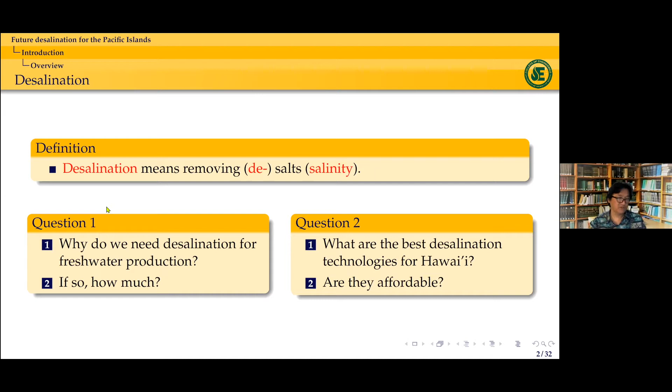Let me start big and then get into the small steps. We are now living in the 21st century, located in the state of Hawaii, in the middle of the Pacific Ocean. If you zoom in on the Hawaii map, there's no land outside of these Hawaii islands. Even so, we have a kind of confined life geographically. We need to know how the world is moving, what the current status of the world is, and how we're going to prepare our lives better starting right now.

There are a couple of terms that define the 21st century: the century of climate change, century of sea level rise, century of population explosion, pandemic disaster - which is new that I just added - and new global governance, meaning that the US was leading the world, but right now this paradigm is changing depending on which country makes more money and the pros and cons of each country. So rather than governing, it's more of a sharing paradigm for the future, both in politics and economy. The 21st century is often defined as a sharing economy. For example, if you have one ocean between two nations, and one nation catches all the fish including small ones, the next year there are no fish. So there should be a certain sharing paradigm between them to optimize performance and minimize any disadvantages.

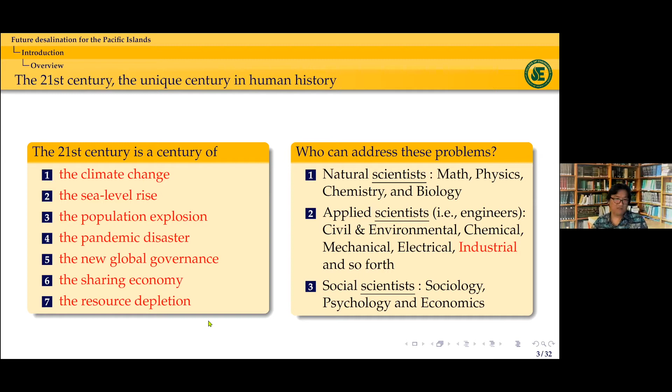So what is the definition of science? There are a bunch of definitions, but most likely science implies observation, experimentation, and making a rule - sometimes called lemmas, and sometimes it becomes principles, laws, and theories. Every single science is based on observation, and we could just observe in a passive way, or we could do better observation based on what we know and what is set up.

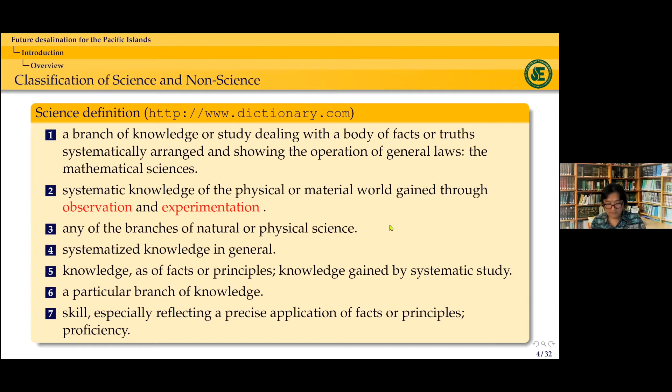So the scientific method is: number one, we observe, just looking at a certain phenomena, make a question and make a hypothesis, then experimentation, analysis, and conclusion. And if these don't match each other, you have to do it again and again until you get self-consistent logic.

One thing we don't always emphasize or remember is that the science we're talking about is fully based on reproducibility or repeatability. So if you do a certain experiment and write a paper to Nature, but the next day you don't get it by changing something a little bit - if you can't reproduce it, or if industry can't reproduce something to make products in a stable manner - reproducibility is the minimum requirement for any science.

However, what we are having in the next decades is not reproducible. Climate change - can you set up any experiment to study climate change? Well, you just cannot. Sea level rise is a phenomenon that will occur, but we don't have any control. We just observe it and try to minimize its impact on human life. Population explosion - no way. Pandemic disaster - you see what all the world nations are doing right now, and we just don't have anything that could control a pandemic disaster. New global governance is all about politics, and shared economy is sharing out of our territorial concept. But the common factor you have to know from item 1 to 6 is it is not reproducible and no one can set anything up. It is a single unique event along the timeline of human history.

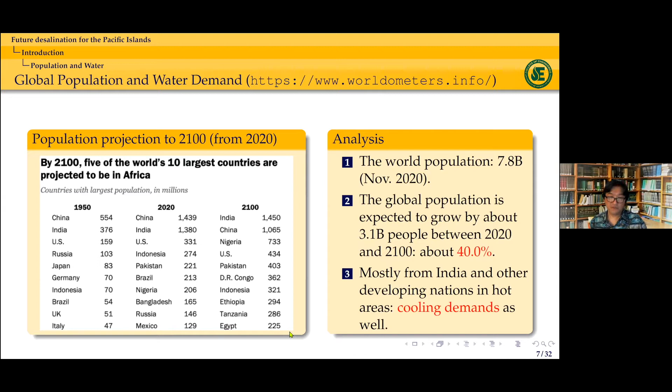You may know that these countries, none of them are in the cold region. They are all in the hot region. Therefore, the cooling energy is also an important factor.

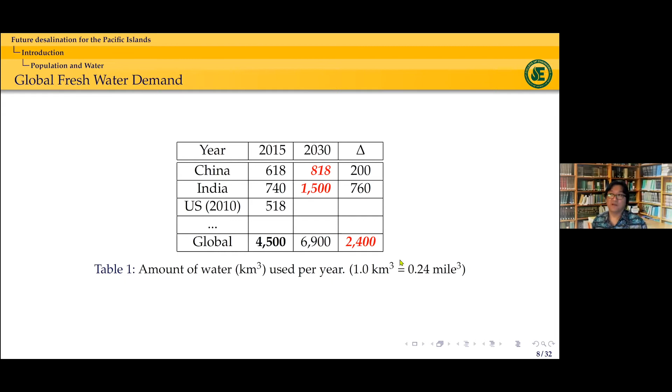Global freshwater demand from China, India, and US - India's demand actually doubles from 2015 to 2030. What we need by 2030 is double what China and India are using right now. So the total amount of water demand that China and India need is what we have to prepare on top of the water resources available at the current moment.

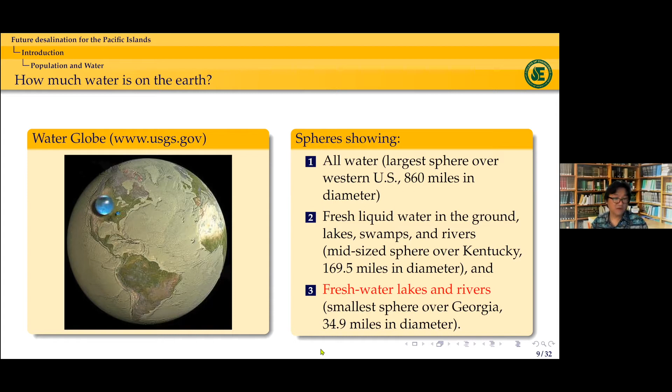The freshwater is the small one. You actually have a very small sphere here, with a diameter of about 34 or 35 miles. So that's obvious here. This is the ocean, and that is fresh water, but not that available. This water is actually non-saline water, but not fresh enough for us to treat right away.

So the amount of water that can be shared by the world population is this much. We know the population will increase about 30% in the next 80 years, but the amount of water would be similar. In that case, we actually have to save 30% of the water we are enjoying right now. So in terms of natural resources, the next decade and probably until 2100, humans will have a tougher life due to lack of enough natural resources, especially water, and that will somehow influence the world economy as well.

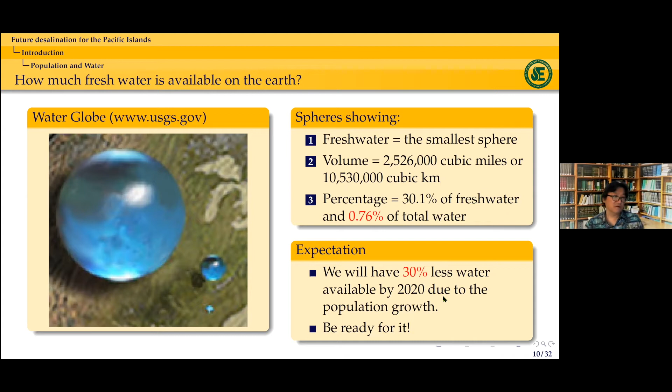USGS - this is public information, and I should say it's not very accurate, but it's okay since it's older data. Total water supply in the state of Hawaii is approximately 270 million gallons per day, that is 900 K tons per day, so approximately 300 or 400 Olympic size pool size. The other data are general data that we have.

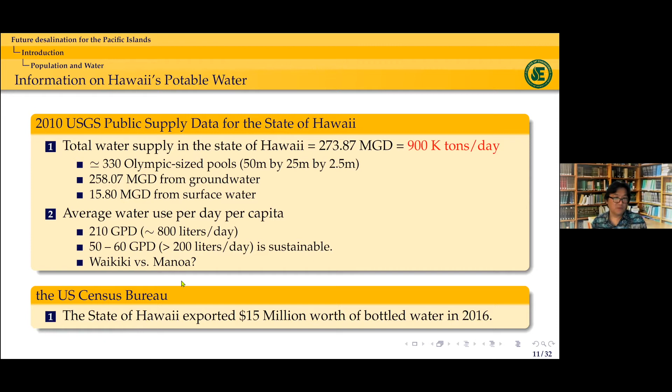Average water use per capita is 210 gallons per day, that is about 800 liters. Right now the average water consumption per day per capita in the US is 670 something, which is way more than what Europeans use. European people use almost 30% of the water that we are using. So water consumption is also another problem we have to readdress. On top of it, cooling is another important factor we don't usually keep in mind.

Here we have a certain way to define how much cooling we need. Cooling degree day means today's temperature in Fahrenheit minus 65 degrees Fahrenheit. When I first saw this, I thought 65 is too low. Recently I figured out why they use 65 degrees Fahrenheit - that is actually 18.3 degrees Celsius, which is just half of human body temperature.

You take this temperature difference multiplied by 365 days to make it an annual value, then multiply by the population - that is the cooling energy demand per nation. The highest one is India, way higher, followed by China, Indonesia, Nigeria, Pakistan, and Bangladesh. If you look at this, there are only 2 to 3 developed countries - United States, Japan, and Saudi Arabia. All other high cooling energy demand nations are developing countries, which need better infrastructure to use energy efficiently.

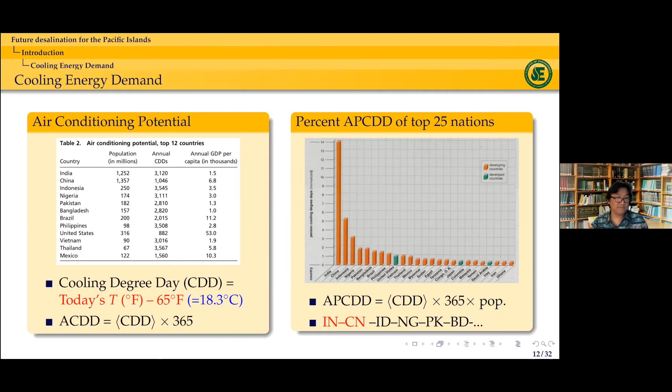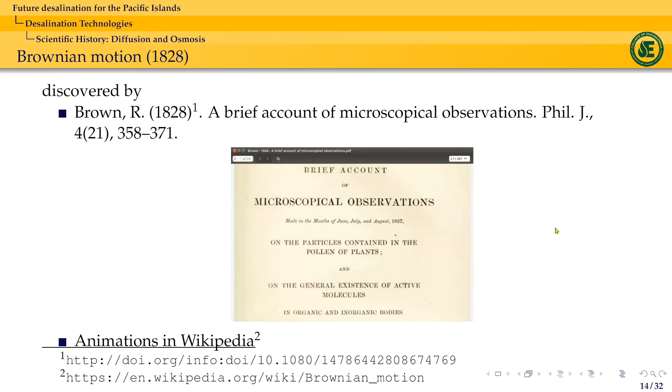Brown discovered Brownian motion in 1828. Then Fick developed Fick's law in 1855, and at that time it was sort of an empirical correlation, but now we just accept it as a law.

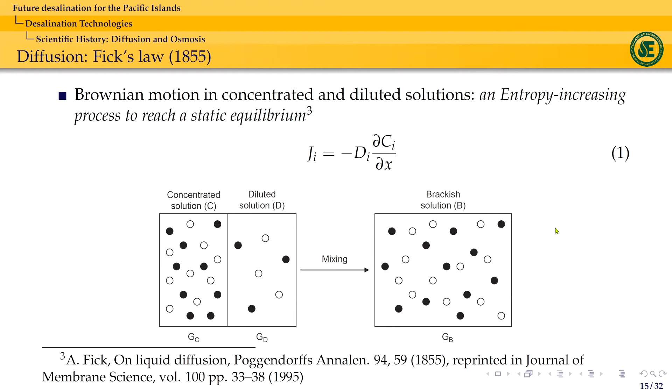Osmosis was discovered by Jacobus Henricus van 't Hoff in 1901, and he got the first Nobel Prize in chemistry. So what osmosis is: if you have water and a concentrated solution, and you remove this wall, there should be some spontaneous mixing. But since this wall or membrane is semi-permeable, only water can move. So instead of solute moving in free space, due to the presence of this membrane, water moves, to minimize the energy difference between two phases. Water moves until it reaches a certain equilibrium due to the pressure difference from gravity and the osmotic pressure.

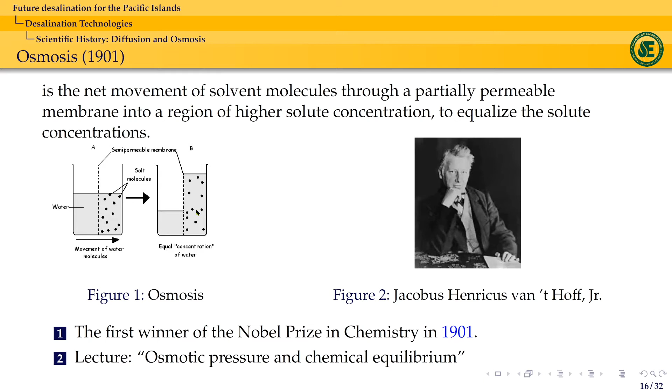Reverse osmosis was developed in the 1960s at UCLA by two people, Loeb and Sourirajan. Loeb passed away about 10 years ago. Currently, the world's largest and cheapest reverse osmosis desalination plant is Sorek, in Tel Aviv.

It can handle about 624 thousand tons per day, and amazingly, the production cost is actually below 50 cents, so $0.5 per ton - one ton meaning 1 meter by 1 meter by 1 meter. They sell the water to the Israel Water Authority.

But if you compare this water price, it's way lower than our daily life price. For example, Evian bottled water has about the cheapest rate, roughly $1 for 330 milliliters. If you convert this into a ton, that's almost $3,000 per ton, while Israel produces water at about 50 cents per ton.

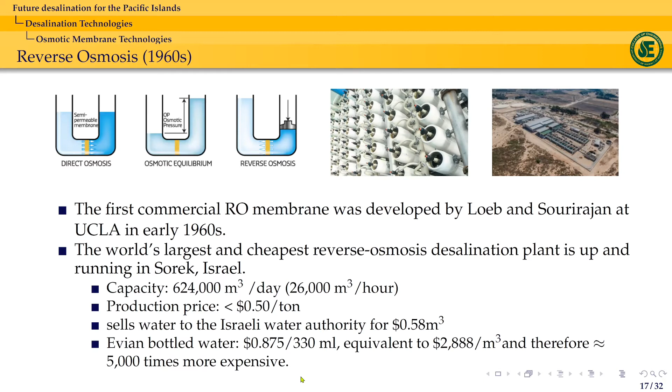So the water price we spend today just to purchase one bottle of water is about 5,000 times higher than the desalination water produced by the Sorek plant in Israel.

The other one is pressure retarded osmosis. In principle, this pressure retarded osmosis could be applied anywhere in the world where an estuary could be found.

The Sorek plant is a seawater desalination, SWRO plant. Before Sorek, there was one called Ashkelon. Ashkelon was the world's largest for a while, but Sorek took over. Ashkelon's capacity is about 30 to 50% of Sorek. So those two seawater desalination plants, the world's largest, actually exist in Israel.

Power - oh, that's, well, I can discuss this later.

So we have three different types of osmosis: FO, PRO, and RO. FO works like this: suppose you have feed, commonly seawater, then you prepare a draw solution that is 3 to 5 times more concentrated than the seawater. In that case, water moves from the seawater side to the draw solution side. The dilemma is, if we could easily remove the solutes used to make the draw solution, then this could be one protocol for new desalination methods. But so far people haven't found another application.

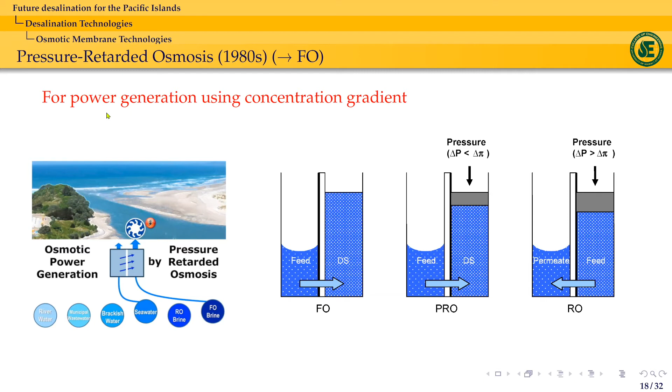And this is how forward osmosis is working. So you actually have a seawater feed, and then you have a draw solution. Water is actually moving from the seawater side to the draw solution side. But the draw solute that we are making is very special.

So either it is well recovered or it is kind of volatile. We try to find a good solute candidate that can be removed very easily. In that case, we are using osmosis to take out the water from seawater by preparing a special draw solution, and then we have less energy demanding processes to remove the draw solute. That is the basic idea of forward osmosis.

Forward osmosis has been researched for almost 20 years, but engineers still could not find a magic draw solute. So technically right now, forward osmosis is utilized for water dewatering processes or food engineering, or anything where you actually have to take out the water and make the solution more concentrated. Forward osmosis can be used for sludge dewatering, or to make certain precious liquids more concentrated, including wine, milk, and juice.

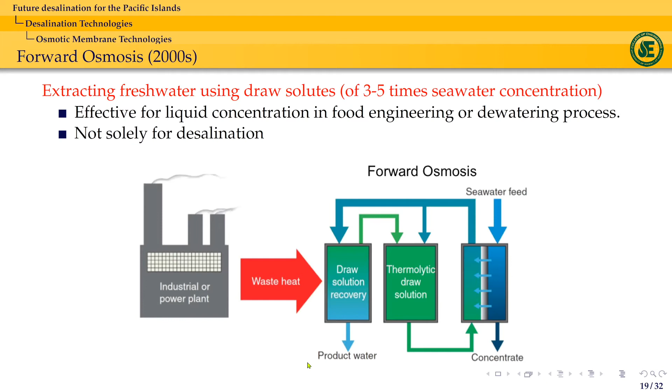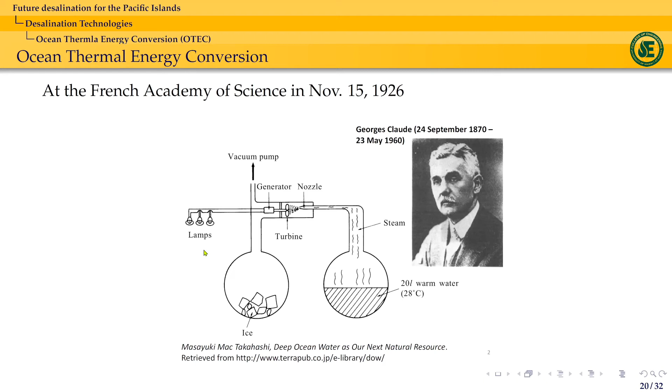That's why OTEC in Hawaii is very famous. Like 500 meters or 1 kilometer down in the ocean, the temperature is 5 to 8 degrees Celsius, and near the tropical region, the surface water temperature is close to 30 degrees. So whenever we have more than a 20 degree Celsius temperature difference, we could generate electricity. But the initial investment was enormous, that's why OTEC is not that popular.

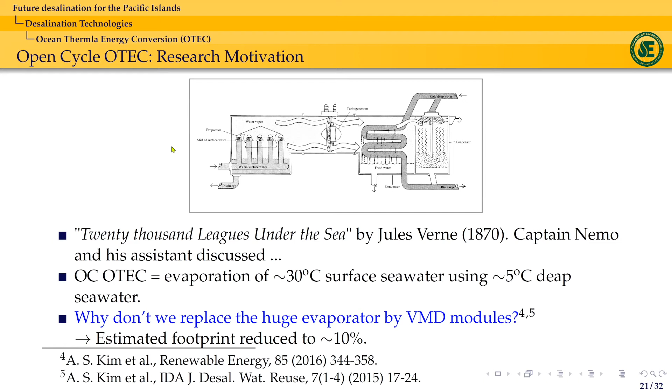We should be very proud of this company, Makai Ocean Engineering. They have only about 30 to 40 people on the east side of Oahu. But this company is world famous due to having a very special technique for managing the deep high pressure pipe installed on the bottom surface of the ocean.

And to increase the temperature of liquid water from 0 degrees Celsius to 100 degrees Celsius, still as water, we need 417 kilojoules per kilogram.

Surprisingly, to evaporate 100 degrees Celsius water to 100 degrees Celsius vapor, we need this much: 2,256, which is almost 7 times the melting energy.

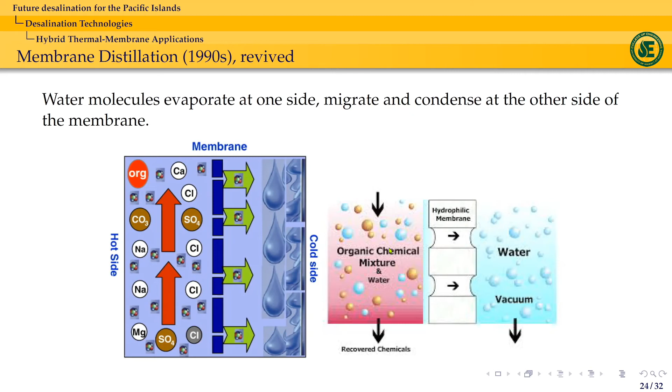Membrane distillation has four different types: DCMD (direct contact membrane), sweep gas, vacuum, and air gap. Your left-hand side is all the same—hot water is introduced, and on the other side you have a cold water flow. That's what we call direct contact.

Or we can just use air, less humid air, to take out the evaporated vapor molecules—that is what we call sweep gas. And you can just have a vacuum, not a perfect vacuum but low quality vacuum, so the pressure in terms of ATM is below 0.01 ATM.

Below 1% of ATM. Air gap is just air gap—you just prepare the cold water in this case, so you could have some dew formed on the surface and take it out. Obviously VMD has the highest flux or performance, and it's less prone to wetting and membrane fouling.

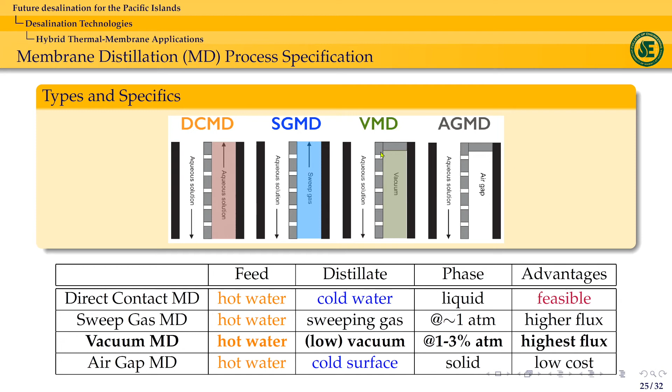This is good news because we could understand and design the membrane distillation plant or processes. However, the real bad news is that nobody can change this line—water latent heat is given. It stems from the molecular structure and binding of hydrogen and oxygen. So no one can effectively change this, which means we always have to pay a certain amount of latent heat to evaporate water.

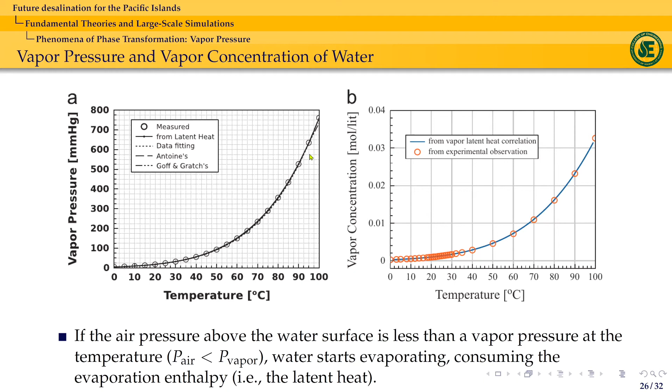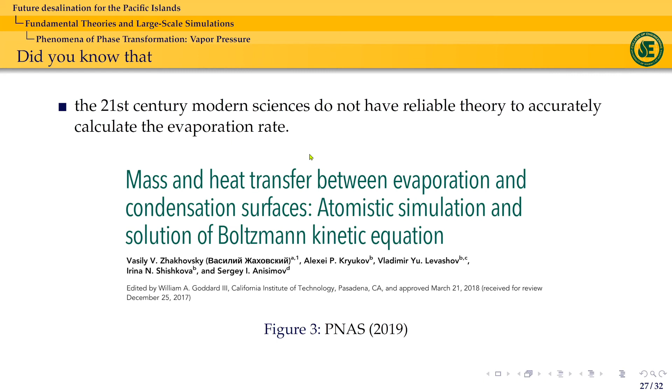No matter what you believe, this is shocking news: in the 21st century, modern science does not know water evaporation exactly. We just know the equilibrium phase, but we don't really know the dynamic phase of water evaporation rate or condensation rate. There's no theory that actually matches the experimental data. There's a very basic theory that requires certain parameters or calibration, but we don't have anything very accurate and fundamental that explains everything about water evaporation and condensation.

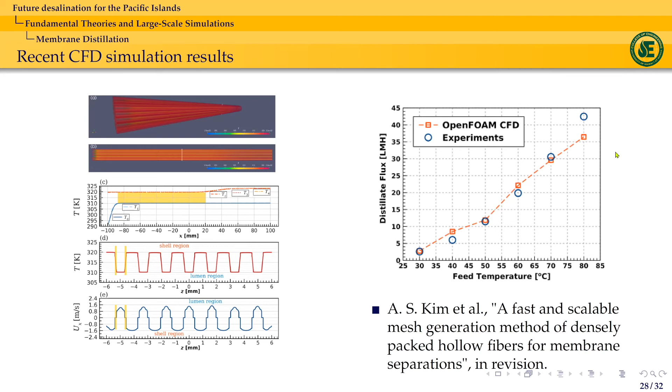This is actually my latest work, where we made a hollow fiber module and did heat transfer CFD simulations. Based on this module and the locations inside and outside the hollow fiber, we have very nice temperature and velocity profiles, and our results are in good agreement with the experimental results.

Hollow fiber is like your straw, although the usage of straw is forbidden right now. You put a lot of hollow fibers and put cold water or hot water inside, and on the shell side outside you have a different temperature. So the two different temperature flows cross in opposite directions and do the heat exchange.

While the heat is exchanged, water evaporates on the surface and migrates to the other side. The problem I had so far is that hollow fiber is quite important because the packing density is very high, so in a given volume you could store a lot of membrane surface.

But industrial applications usually have at least 1,000 or up to 5,000 hollow fibers in one module. Most theories available only take care of one hollow fiber, and there's no way you could do this larger scale simulation using CFD, mainly due to not having any meshing algorithms. So this is what I just did recently.

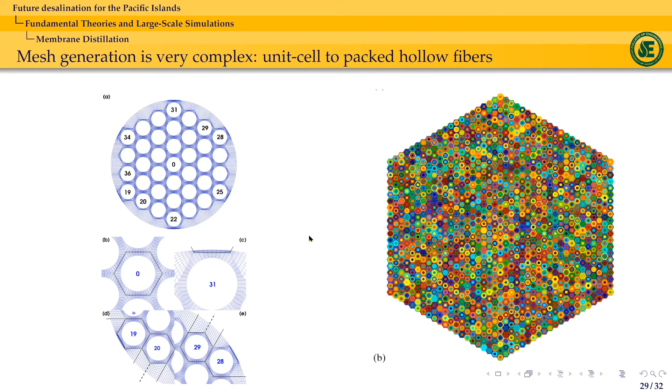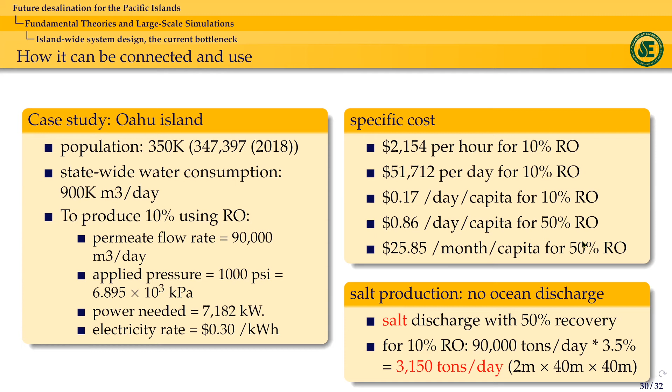Fundamental principle: there's no single device that can do everything, and all the processes should be well linked in an organic way. The overarching goal is zero chemical discharge. That became a crazy, impossible idea, but right now it's almost like a standard of all desalination applications, along with net zero power consumption.

Using leftover resources like electricity, temperature gradient, or concentration gradient, you could make power little by little. So to operate you should start with certain power, but at the end, in the steady state, the power consumption is almost zero. Therefore it is most likely a self-supporting or self-sustaining process, which is actually the future way of desalination, especially in isolated places like Hawaii.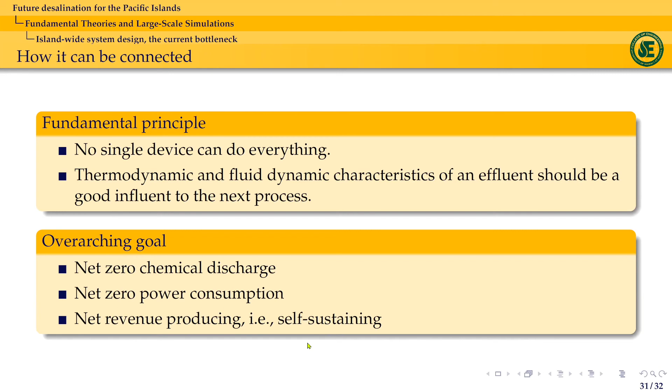If possible, there could be a way to produce certain revenue. One way is that you could sell the salt, if you could, but there are certain laws out there to prevent it. However, there are certain things we could work on to make net revenue from this desalination.

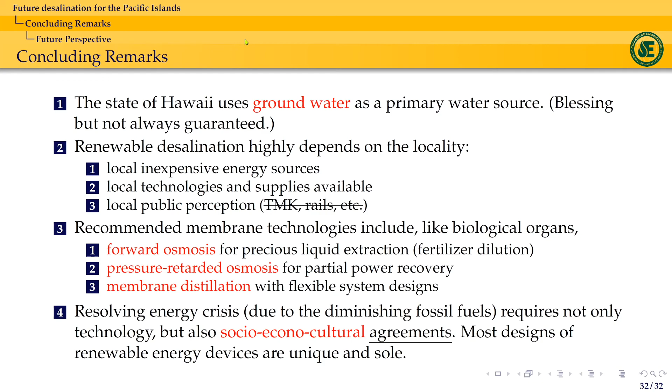Yes, the answer is yes. And what is the cost of power that plant uses? The Israel plant, the seawater RO plant—what is the cost of the power, or the power requirement consumption? Okay, let me say it this way: the Sorek and Ashkelon plants have a price of about 50 cents per ton. This is amazingly cheap, but that cost can't be achieved everywhere. The reason is that a big desalination plant is usually co-hosted with a big power plant.

So you have a power plant and a desalination plant, and they exchange resources for free. The power plant's seawater intake comes out warm from cooling, with temperature increased up to 40 degrees Celsius, and the viscosity decreases to half. So you actually need half the pressure to pump the seawater compared to 20 degree Celsius seawater. Then the desalination plant produces fresh water for a clean infrastructure for the power system, and the power plant gives very cheap electricity in return. So technically, applying residential or industrial power rates to a small desalination plant is almost nonsense—they should have a certain agreement with the government and the nearby infrastructure.